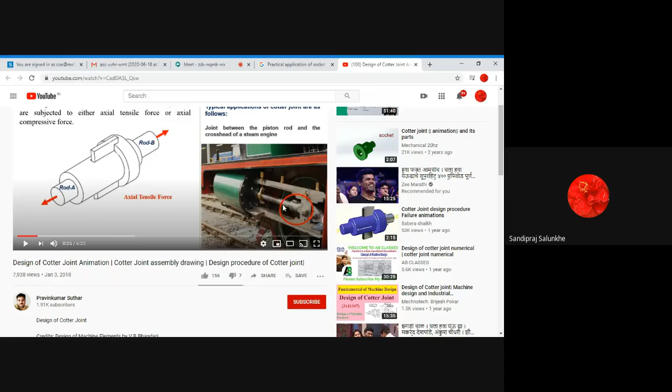Nowadays this particular application is also used for the braking system of railways, up to the suspension point. That's why I told you it is very rare to see the application of cotter joint nowadays. It was initially widely used in locomotives as well as ships, but it has been replaced by the knuckle joint, because the knuckle joint gives more degrees of freedom, and that's why its application is restricted.

But still we are going to utilize it for transmitting tensile load, and it is going to give us a basic idea about how machines or components are designed.

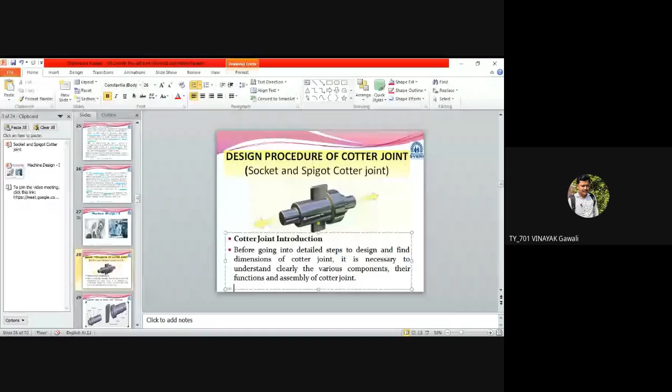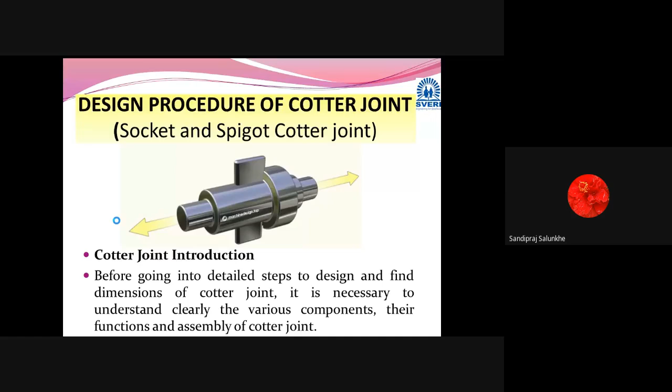Before going to the detailed steps of design for finding the dimensions of this cotter joint, we'll see the various parts which are there on the cotter joint. The first point which we are going to see is the socket. Now here you can see the detailed drawing of this cotter joint.

Out of that, this is the rod basically where we are going to transmit the tensile load. Here also this same type of rod is there which is capable to handle the tensile load. Now this particular part is called the socket end. This socket end is made hollow inside, and this is called the spigot end.

This spigot is inserted inside this socket, and later on this cotter pin is inserted in the hole which has been provided for the cotter joint. Hence this spigot and this socket get locked because of this cotter pin, and it sustains the tensile load.

If we are not going to insert this cotter in between this slot, then easily this spigot will come out from this socket, and there will not be any use of this joint.

Now if you see this cotter pin, it is made somewhat taper. You can understand why, because if you are going to assemble it together, then easily by means of application of hammer force here you can assemble this cotter joint. And if you want to dismantle it, just hammer from the bottom side, and this cotter will come out, and you can disengage the cotter, socket and spigot.

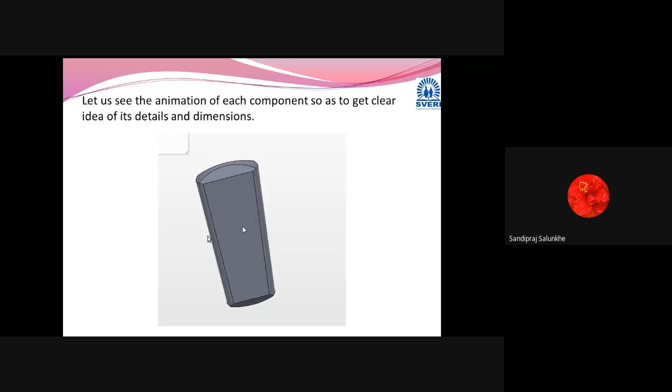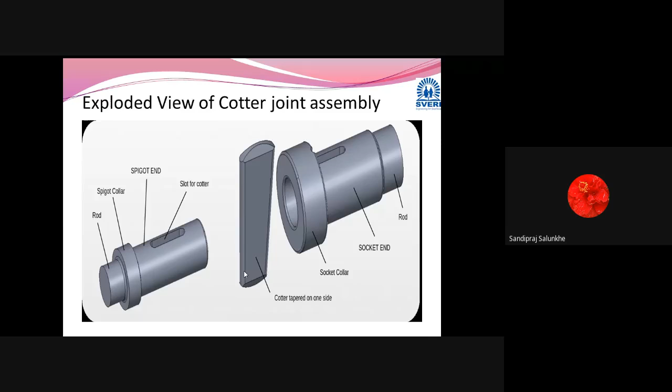Then this is what you are going to call the spigot, as mentioned here. This spigot is made of solid shaft, where we make this groove for the cotter joint, and the remaining part is kept as it is for transmitting tensile load, as well as it is capable of handling compressive load also.

Now this collar is made so that we can restrict how much this spigot will get entered or inserted into the socket. That's why this collar is made, and this collar also helps us to sustain compressive load.

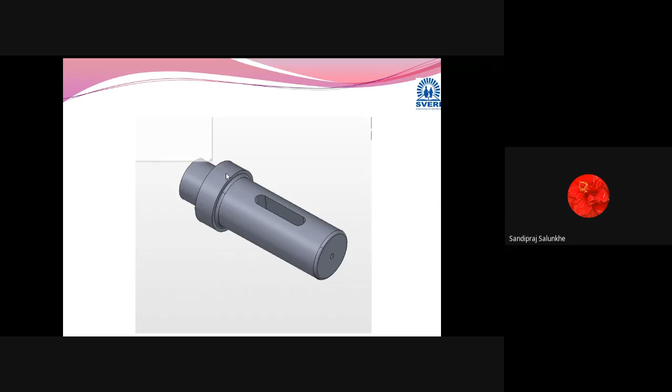Next, this is the socket, where the hollow part is made, inside which we can insert the spigot, and these two holes are provided for inserting the cotter. Here also you can see this collar is provided. This collar is capable of taking compressive load, just as at the spigot end you have seen the collar.

These two collars are going to meet each other, and they are somewhat capable of taking compressive load also, so they can transmit tensile as well as compressive load. But in most cases, this specially designed cotter joint is made for tensile load only; very rarely, or for a very short time, they sustain compressive load.

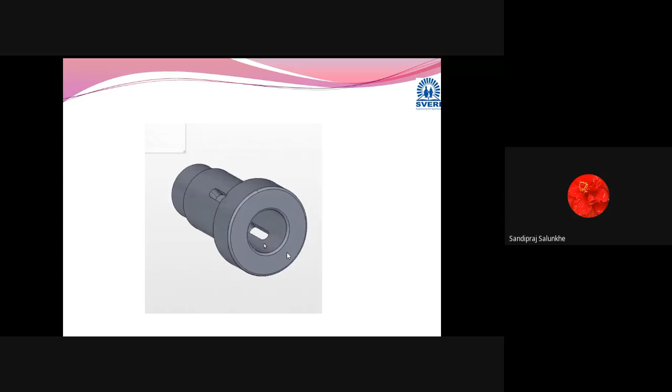Now one by one, let's describe this spigot, socket, and cotter. The spigot is the male part of the joint. It has a rectangular slot for passing the cotter through it. As already seen, the rectangular slot is provided, and inside that slot we insert the cotter. The spigot has a collar which rests against the socket end, which restricts the transmission of the spigot inside the socket.

Spigot inside the socket, okay. Now the socket is also made - it is the female part where we insert the spigot, and holes are provided so that we can insert the cotter.

The main part is the cotter, which has to withstand the shear load, because most commonly the part which fails inside this cotter joint is the cotter itself. It fails easily so that we can replace that cotter instead of replacing the spigot and socket, because they are more costly compared to the cotter pin, which is cheaper. That's why it is made such that failure will occur in the cotter, and later we can replace it. Though again, the failure criteria has to be applied on the cotter, and we have to make such dimensions of that cotter so that it will not fail.

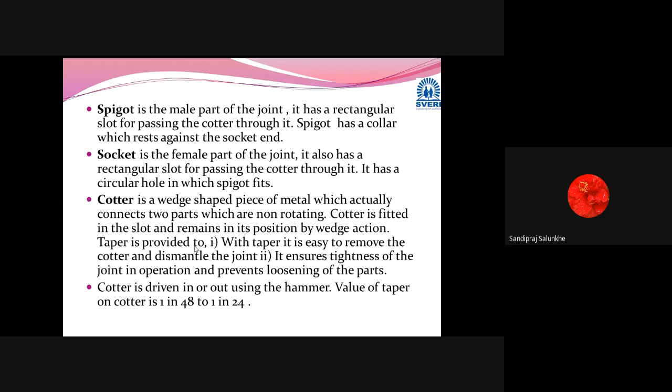Okay, then it is made with a taper also. As already mentioned, the taper is made on that cotter so that assembly and disassembly becomes easy.

Now this is the conventional drawing of this cotter joint. You might have drawn this particular thing while learning the machine drawing subject, where assembly and detail drawings were done. Now this drawing not only shows how the cotter joint looks, but it also shows the various dimensions.

Now here we'll start from the applied load. We use P as the convention for the applied load. Second, we consider small d as the diameter of the rod. Now these rods are kept of the same diameter at the spigot end and the socket end too, because they are sustaining the same amount of tensile load.

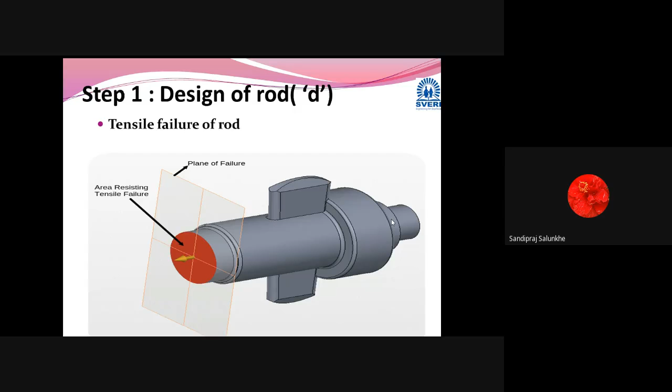So when we consider this rod, the area which is encountered by means of this stress has been elaborated in this slide, showing which area is encountered by means of this tensile load. This rod is elongated. Here it has been shown which area, shown in this red part. Now this tensile load is applied, and hence this rod will get elongated and this area will get encountered.

Now we have already decided that D is the diameter of that rod. Then what will the area be? Easily one can calculate that as pi by 4 D square, and this sigma T, because sigma T is the tensile stress which has developed in this rod. Sigma T is equal to force divided by area. Now this area, pi by 4 D square, is taken to the stress side, so that one can calculate how much P, that is the tensile load, can be applied and sustained by means of this rod.

Now once you are going to decide this value P, let's suppose we are going to use this cotter joint for 100 kilonewton force which is transmitted, tensile force which is transmitted. Then this P value will become 100 kilonewton.

Then we have decided which material we are going to use for this rod. This material will give the material property, that is what will be the tensile strength of that material. The sigma T value will be given. Now how we are going to decide this sigma T? Are we going to take it as it is?

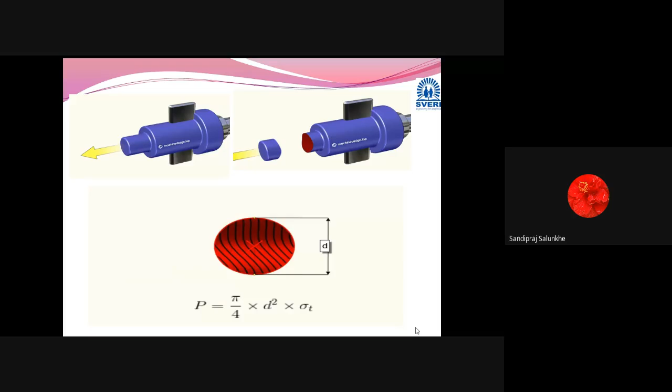Now it is in the designer's hand as to how much factor of safety you are going to use for that. We are going to see it in detail when we are solving problems.

Now here it is written that since the area resisting is circular, using the basic equation of design, load is equal to stress multiplied by area, or stress is equal to load divided by area, we can calculate how much load will be sustained by that rod, or what will be the diameter of that rod. This is mathematical equation only.

So area resisting for the tensile, multiplied by allowable tensile stress - this allowable tensile stress is calculated as sigma, SYT divided by factor of safety. It is written in mathematical form only, and from that you can decide the diameter of the rod. From this equation, determine D of rod, that is the diameter of the rod, calculated for the given application, for given tensile load P, of given material.

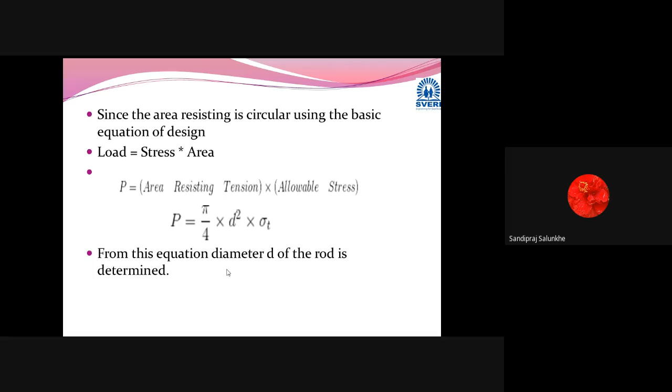So here, once you have calculated the diameter, that diameter is kept as it is, that you are going to use for the rod. Now step 2, design of spigot. Once you have decided the diameter of the rod, we are going to take the next part for designing or calculating dimensions of the spigot.

Now spigot dimensions are there - D2 is the inner diameter, D3 is the outer diameter of that collar, T1 is the thickness of that collar, A is the width, which is towards after the cotter. So it is also considered as a tensile failure - it is also sustaining the tensile load, and that spigot is considered under tension.

Now this slide shows how the tensile force is going to break that spigot. Here also, if we are going to use ductile material, failure will occur before it gets to total fail - that is, elongation will start, and that will start at the yield strength. So once the yielding of the spigot starts, we are going to consider that as failure of the spigot, and hence we are going to restrict the stress level up to the yield strength only. Above that yield strength, we are not permitting the stress.

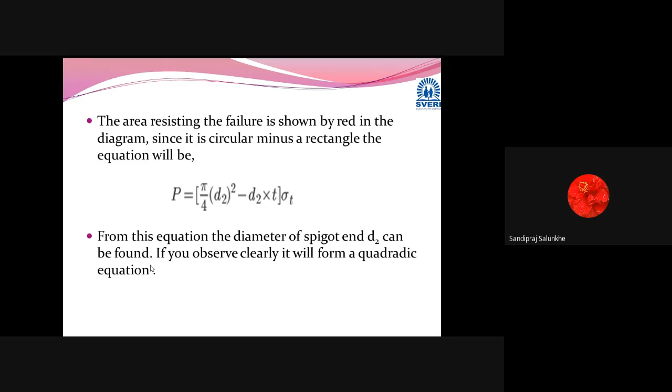Yes sir, right. Okay, so once you find out the diameter of that spigot, outer diameter of that spigot, then that is the same diameter for the socket, that is inner diameter of this socket. So it is not necessary to separately find the inner diameter of that socket. It is the same as the outer diameter of the spigot.

Now, next thing we are going to calculate by means of arbitrary formulas, or what we can say, experience. This D3 is the collar diameter, and that is called empirical relationships. By means of these empirical relationships, we are going to calculate the collar diameter as 1.5 times rod diameter. Already I have told you that rod diameter is very important, based on which we can decide the other dimensions too, and we can make this design procedure somewhat simpler.

Otherwise, this total design procedure will become complicated. We have to go for each and every dimension to find out. Instead of that, this experience or empirical relationships are developed for this cotter joint, and these dimensions are calculated. So D3 is the collar diameter, calculated as 1.5D. A is the width where we are going to keep this towards the rod side of this socket.

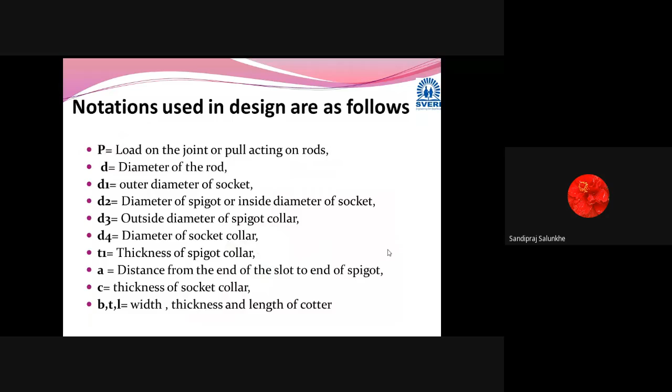Okay, I will show the slide where we are. Yes, this is the A dimension, that is how much part we have to keep inside the socket of this spigot. So that is nothing but the A dimension we have seen, and this A is again calculated by means of empirical relationship with the diameter D.

So this A is 0.75 of D. Okay, T1 is the thickness of that collar. That is, once you have found out the diameter of that collar, T1 is the thickness of this collar. Here you can see.

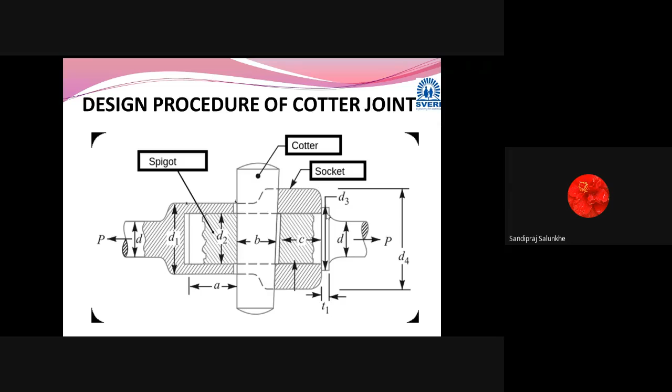This is the T1, thickness of this collar of this spigot. This thickness of collar is calculated by means of empirical formulae, that is 0.45 of D. So we have calculated all the dimensions of the spigot, and that D2 diameter which you have calculated in terms of T, that D2 diameter again can be calculated once you find out the thickness of that collar.

Next, this is what we have considered as a tensile stress. But is there any other possibility that stress may occur in case of that spigot? That is the crushing stress.

That is, while we are transmitting the tensile load by means of this cotter joint, there may be possibility that it may get crushed. That cotter may be doing crushing on that spigot. So that area which we are going to consider will sustain the crushing stress, and this crushing stress is as good as the compressive type of stress. But as the nature of load is crushing load, we are going to consider it as a crushing stress. Otherwise, in a simple way, we can consider it as a compressive stress.

So this compressive stress is calculated. This stress is calculated by means of SYT divided by the factor of safety. That is how much strength you want to give for the spigot in case of compression or in case of stretch. D2 is the diameter of that spigot, the outer diameter of that spigot. T is the thickness of cotter pin.

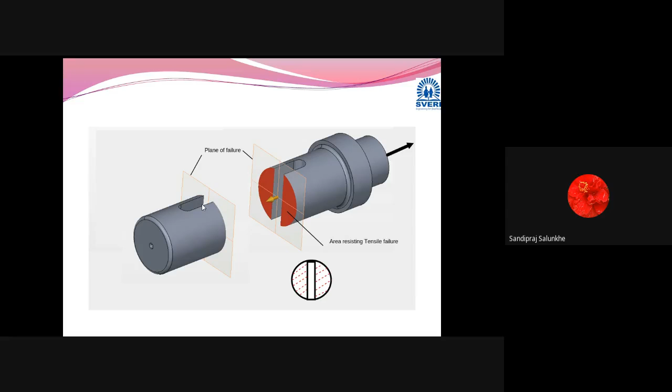And area of rectangle is calculated by means of d2, that is the diameter of this circle, multiplied by t. T is the thickness of this cotter where you are going to insert the cotter in this slot. That's why t. This T multiplied by d2, that is the area, multiplied by stress.

So load is equal to area multiplied by stress, and hence we can check that value of sigma c is within the limit or not. And once you find that the sigma c is within the limit, then we can say that the design is safe. Now this all we have seen for the compressive load.

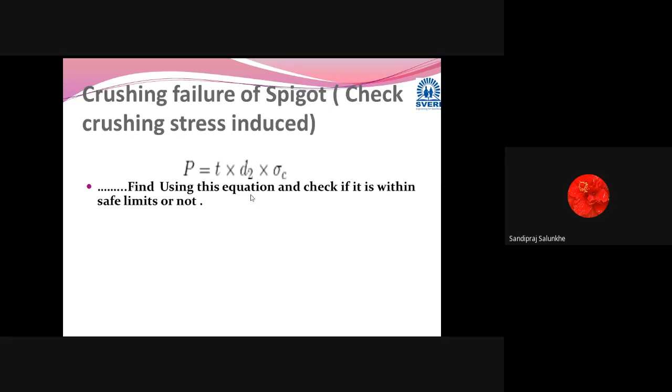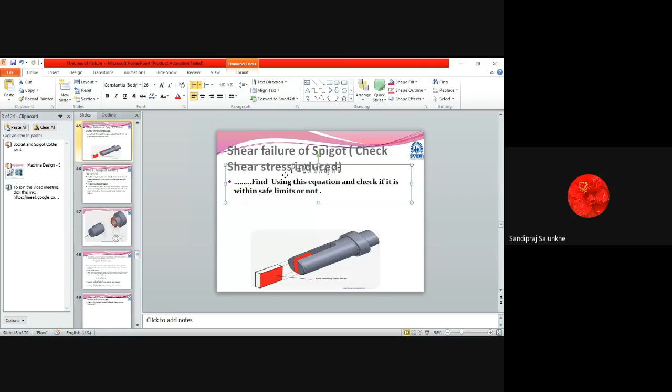Now, what will happen if the tensile load is applied? And that tensile load is going to create shear of this rectangle which you are going to see here.

As we are going to use this cotter, and this cotter has dimension equal to this slot, there may be possibility that this cotter may slide this rectangular volume with the cotter, and this spigot may get slide to the other direction.

So again, same formula we are going to use. Area multiplied by stress is equal to force. So as already we have decided that P is the tensile force which is applied, now shearing occurs for this rectangle.

Now this rectangle dimension can be calculated as A is this remaining part, this part inside the spigot. After the cotter joint, whatever may be the length which is remaining inside the spigot, that you have decided as A. That's why this rectangle has a length equal to A.

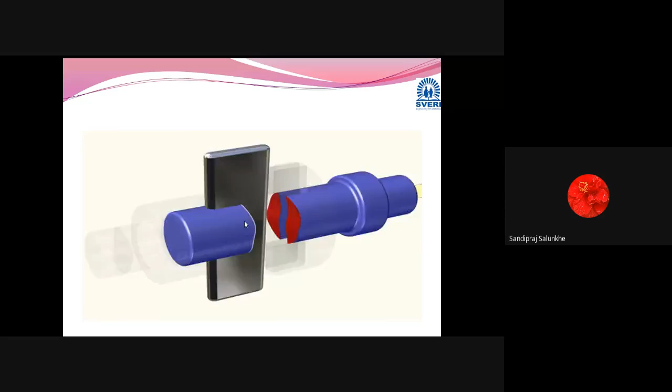And we can calculate the dimensions, that is A as well as D2. Already we have calculated this A and D2 in case of tensile stress. D2 we have calculated, as well as A we have calculated from the empirical formulae. So what we can do with this formulae? With this formulae you can check whether this tau is within limit or not.

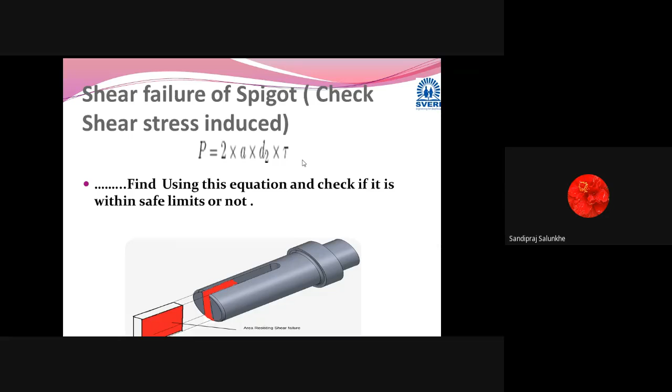The main important thing is that we have to consider tensile load, and later on this crushing stress and shear stress are considered, and they are checked whether they are within the limit or not. So all the entire dimensions of this cotter are calculated or found out, and later on we go for the designing of the socket. Now this socket is designed and its dimensions are calculated by considering the same thing and the same type of load.

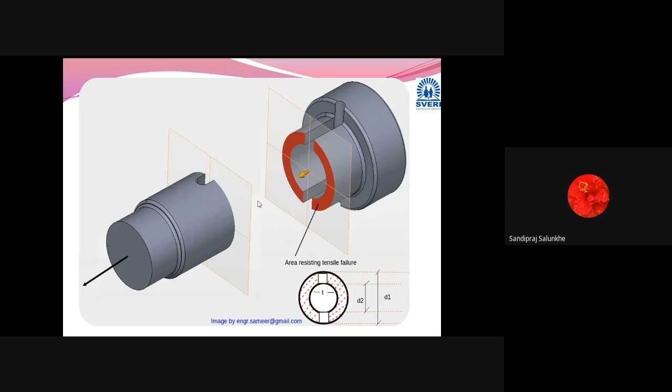So we will see this thing in the next lecture. Today we will stop here. Before we close our session, let me know, do you have any question? Anybody of you?

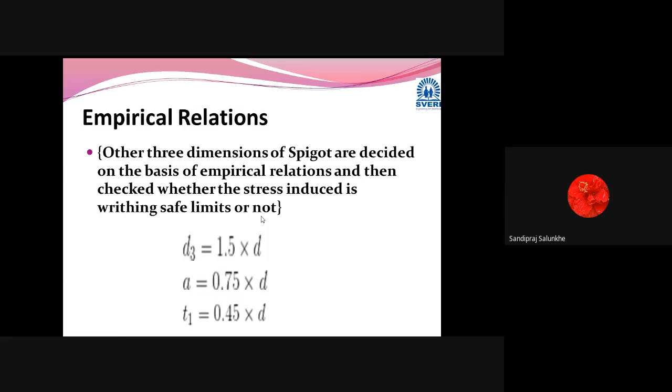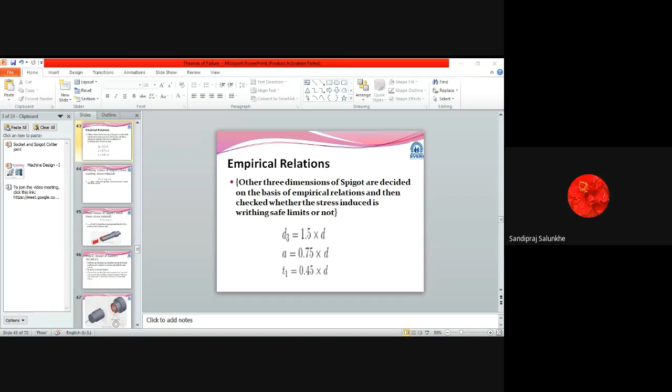Any other question? Anybody else? Any question? Hello? No, sir. No, sir. No, sir. Okay, no problem.